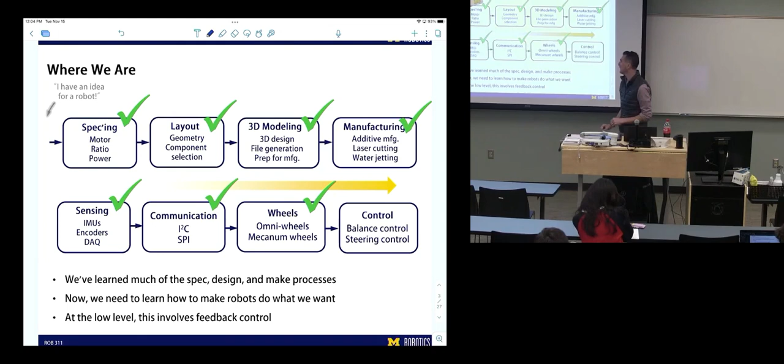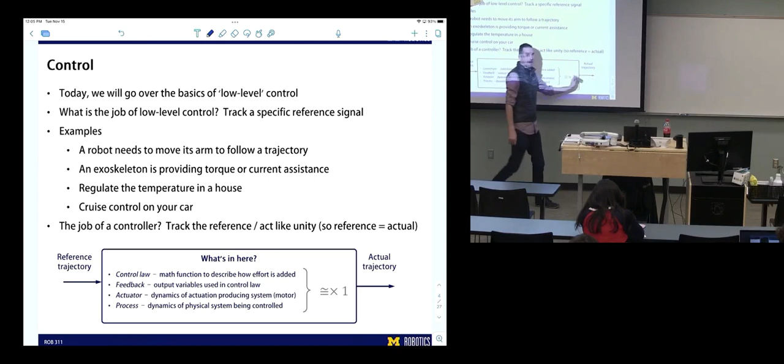So we talked about control. What's the number one objective of a feedback controller? What is its goal? Track a reference, that's the game. Everything is about tracking a reference, which we might think of as making a robot do what we want it to do. We want it to track a reference. So our general idea of a control strategy means we want this control strategy to just equal 1. If it equals 1, our reference trajectory will match the actual trajectory, and it's a perfect controller.

Why doesn't this work? Why is this hard? All the systems have lag. The systems have their own properties, and those properties can have lag. That lag makes it not quite so easy. Good.

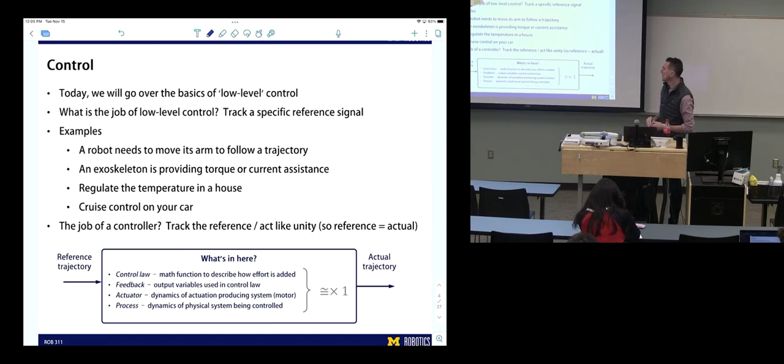This was setting up both why it's hard, but also the standard diagrams for a feedback controller. We talked about how each one of these is a function represented by an ODE, a differential equation. If you've taken other feedback control classes, you might represent this as a transfer function inside each of those, but this class does not deal with transfer functions, so we won't talk about it.

Do you guys have a clear picture of, for example, what the ODE was, where it would come from for the actuator dynamics? Or is that not clear to you?

Yeah, just like torque equations or the angular velocity and acceleration as the differentiable variables. So it would be a set of equations.

So motors have two inputs and two outputs. There can be lots of equations that relate what it is that they do, but they come from Newton's second law, the equation around inertia. We use that as KT times I equals J times theta double dot plus B theta dot plus torque, load torque.

And we also had Kirchhoff's voltage law, which gave us the voltage relationship, including current and its derivatives. So those two equations can be rearranged to get this relationship. We aren't going to talk about exactly how to do that because we're not really learning the tools to do that, so just know that's what's in here.

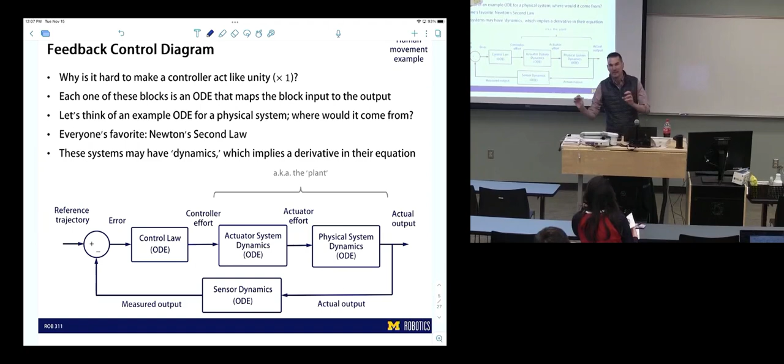What are we showing here? What is this whole thing? What's going on there? Why am I showing that to you? That's a good question to always ask yourself to check your knowledge. If you're not understanding where I'm coming from, you should be able to answer why did I show this to you. A lot of this content has been curated with a really specific intent. So what's going on here?

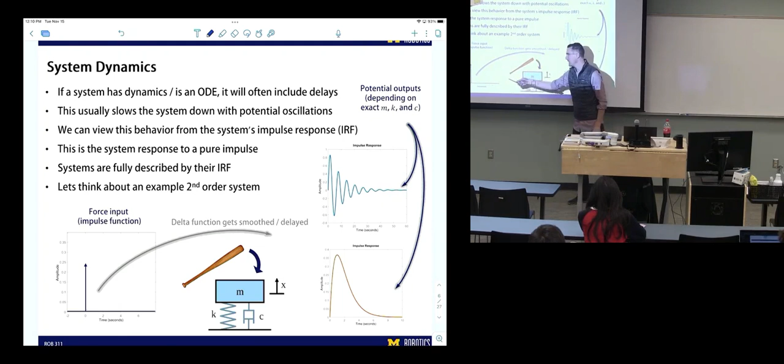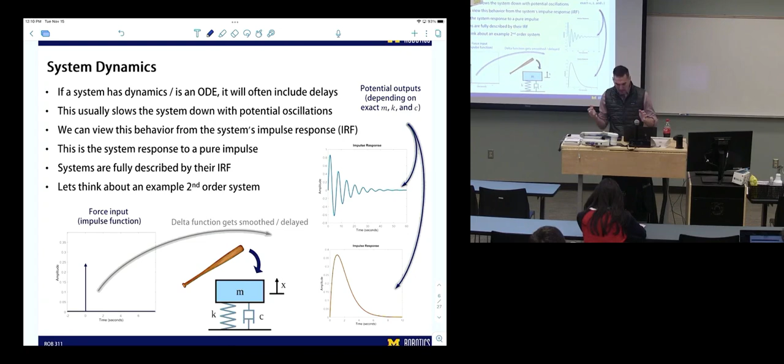Who knows convolution or has heard of it? You guys know that if you take the input of a linear system and its impulse response function and convolve them, it will give you the output of that system. That's another reason we touched on this—to help you get familiar with seeing these concepts. This is refreshing these concepts of system dynamics.

Dynamics exist in each one of these blocks. Those dynamics add delay, they add challenge to the physical system, and this is kind of where we would get each one of these ODEs. What do we say about sensor dynamics?

Fast. Which means there's going to be minimal lag associated with your sensor. That's another way of saying the actual measured output should be very, very close, even at high frequencies—it's going to track closely even when it's oscillating very quickly. Yes, that's good, that helps the whole system. That's a desired property of sensors—you want them to be fast.

Does an encoder, like an optical encoder, have dynamics?

I would say it doesn't, because you're looking at the actual physical change and it's being measured, so there's no delay between when it happens and when it's read. For example, with an IMU that has a big mass on a spring, the size of that mass is going to govern how that sensor senses. In an encoder, there's no concept of that. It's motion, that motion is read. There's no dynamics. Make sense? Okay, good.

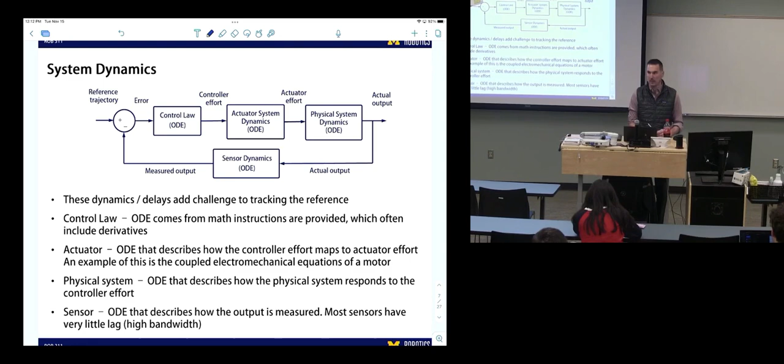Awesome. Okay, so now we're kind of going back into PID. The number one game is drive the error to zero. If the error is driven to zero, the system is acting like unity, has unity gain. That's what we want. Our control law is going to operate on the error, which is the difference between our reference and our measured output. Everything's going to be about driving that error to zero. We defined three terms, P, I, and D, and the total controller effort is the sum of those three terms.

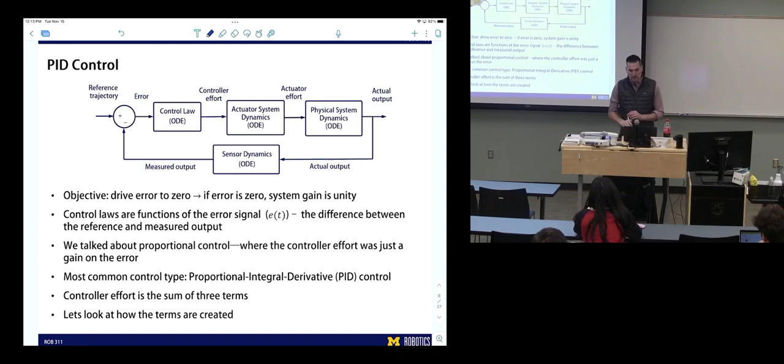And we talked about how these terms are created. You guys are comfortable with this, I think.

What's going on there? Why is there a tau in there? There's no tau in anything else. What's going on there? Yeah. Can't really, your bounds can't be the same variable as the actual integral. That's true. But why is this bound a different time variable?

It's integrating over time to get a single value, and the area that it's integrating over is time, but it's not the same time as t, which is one of the bounds. So does that make sense? It's integrating over - if you want to evaluate at t equals now, we have to integrate over time. So we're not integrating over t time, because that's what we're interested in. We're calculating the value for t equals now. So we're going to integrate over time in the past. That integral from t0 to t goes up to time equals now of time tau. Not sort of a different t, but it's still time.

Make sense? So I'm trying to think of challenge questions to check how well you guys are tracking this. Let me think. I think I'm good with this. I'm gonna keep going.

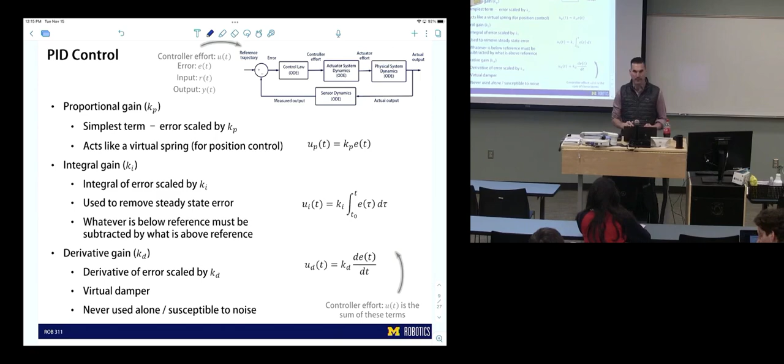We did this example, which was cool. Almost all of you got this. This is great. If you can calculate this and these terms, then you're tracking PID well. If you can't, then that would be bad.

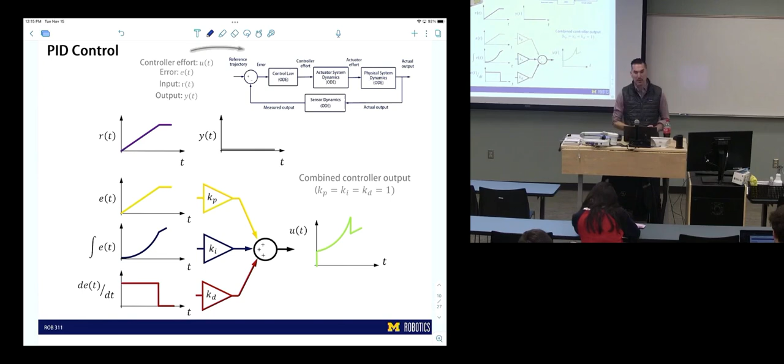So if I had more time, I would have created a couple of versions of this, a couple of exercises, just as practice. But first, identify your error function, then you're going to manipulate that error function. It's easy to figure out its derivative and integrals once you define the error function first. Then we just sum them, multiply by their PID gains.

This gave us some vocabulary about how to talk about control, these concepts in the time domain: settling time, rise time, percent overshoot, steady state error. Just gives us a vocabulary for me to talk about. And then we talked about this being a type of test called a step response test, which is pretty much the most common way to tune a controller.

In order to do this type of test, you have to be able to see your data. So you have to be able to save your data and look at it. We've learned how to create this data matrix and save it, so you guys could do your own step responses. That would be very doable. We're also going to learn tomorrow a way to plot your data live.

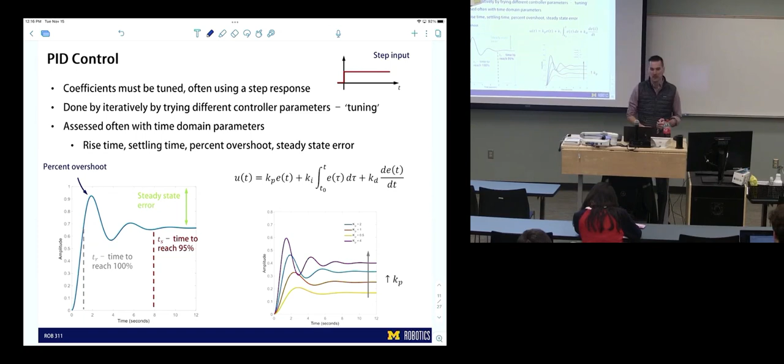We also talked about how to tune. We have to set these PID controller coefficients, and we talked about how to do that. There's some literature on it called Ziegler-Nichols. We did a shorthand version of that where we increase KP, back it off, then we're going to increase KI to remove steady state error, and then increase KD to remove oscillations.

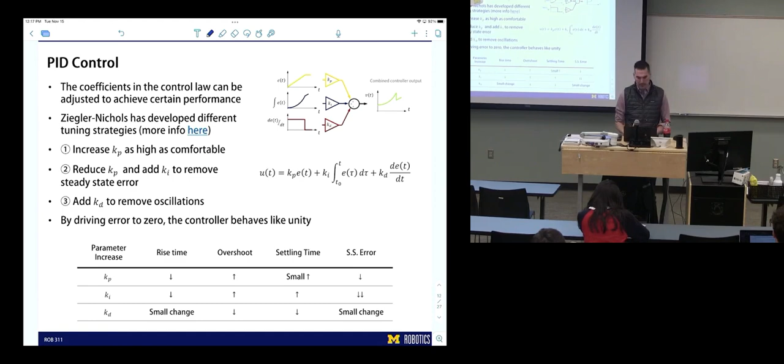We talked just for a second about reference trajectories. The only thing I really wanted you to know is that the higher the frequency content in the reference trajectory, the harder it's going to be to track.

The harder it is to track, another way to say that is the controller gain will not be 1. Does that make sense? If the controller gain is 1, that's equivalent to perfect tracking. So if it's harder to track, the controller gain will stop being 1. Will it be greater than 1 or less than 1?

So let's say I'm trying to give it this reference to track, a fast trajectory. I wanted to track something moving very fast. We talked a little bit about what we think it's going to do. And you guys knew this. What's it going to do?

It's gonna have like the amplitude, it's gonna kind of lag behind a little bit with a small amplitude. Yeah, it's going to start lagging behind. The amplitude's going to decrease, which is going to make the overall gain less than 1. So the gain for this would be 1 for low frequencies, and then as the frequency increased, we'd start to see the gain become less than 1, and eventually the gain would be 0.

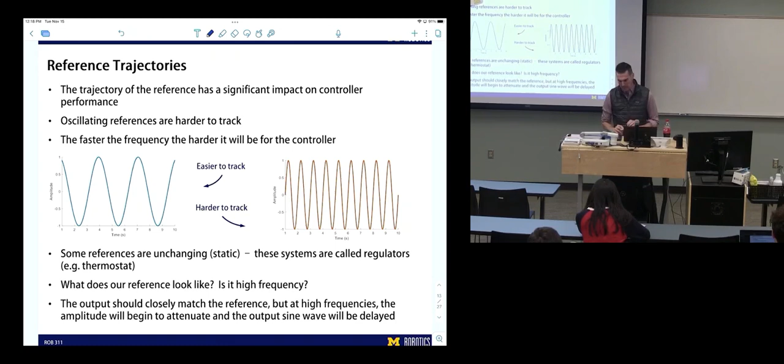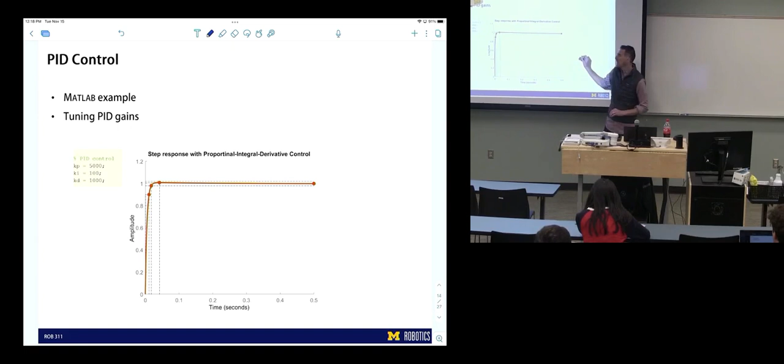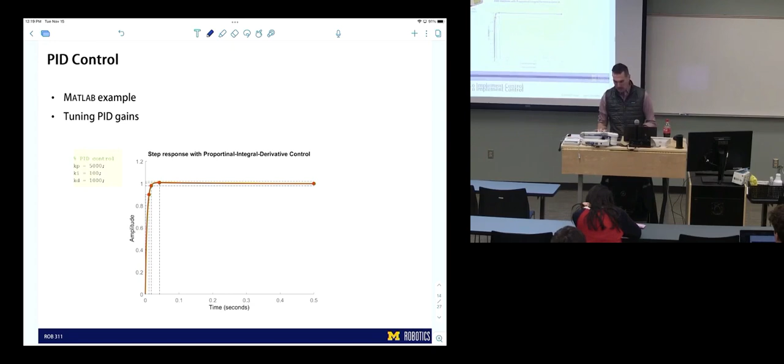Cool, okay. We did this tuning example, which was pretty neat. You guys did great on that, turned it in. Here's just an example of what I did. This shows all, if you right click and have it show all the characteristics, that's what's being shown in MATLAB. So you have practice tuning it in MATLAB, practice looking at your step responses and analyzing them and viewing their different characteristics. You guys feel good about all this? Awesome, okay, now we're going to go into actual lecture content.

Now what we're going to talk about is how do we actually implement this in code. This is maybe review for some of you, but I want to make sure everyone knows it. We're going to go through your control loop structure. These are concepts you've begun to see in lab, but now we're going to talk about it formally in class.

Your control loop's going to iterate every, in our case, 1/200 seconds. There are a few things we want to discuss when thinking about implementing control in software. How do we calculate the derivatives? And how do we deal with nonlinearities, and what are they?

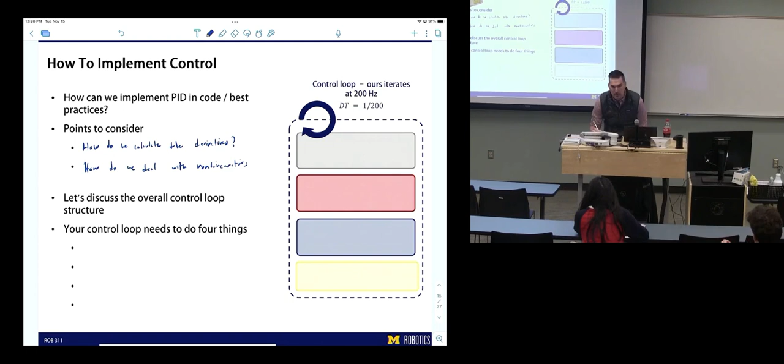Let's talk about control loop structure. This is what we talked about in lab in the past. What's the first thing that your control loop does? It collects data from sensors. Then what does it do?

Do you know, or what's the next thing it has to do? Calculate the error. I'm going to call that as a whole: calculate actuation commands. Then it has to actually send those commands, execute those commands on the actuators.

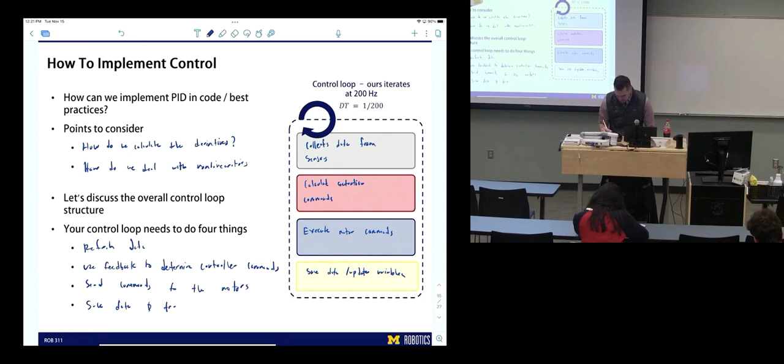And we need to save data and update variables. Those are the four jobs going on inside your controller: refresh data, use feedback to determine controller commands, send commands to the motor, and save data and update variables. That's it, that's all it's doing, and it's gonna do that real fast.

Data collection. First thing we gotta do is collect data from all of our sensors. Generally, the way this would look normally is a series of communication library calls. What's a communication library? When I say it would be a series of communication library calls, what does that mean?

We have our messages.py file, which has all of the different message types available to us. You have to essentially pull some data from, I guess, the Pico through that. Yeah, that's how we do it in our system. So in our system, the data are being refreshed automatically in the back end for you. You don't have to do anything to get the data; it just appears in these state variables for you, which is awesome, a very clean and efficient way to do it.

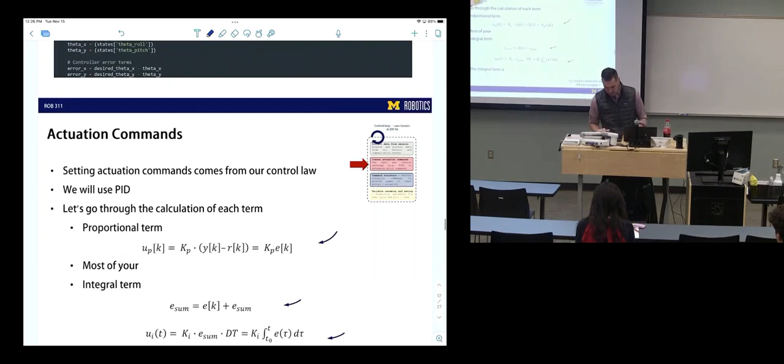This is an example where we're just kind of getting the data like you've seen before. Step one, get the data. Step two - this is kind of where the meat of today's lecture is, actually building these actuation commands.

We're talking about PID. We're gonna go through these different terms and talk about some nuances to calculating these terms.

So this is your proportional term. UP of K - that means that's the controller effort from the P term at loop index K. So that's just gonna be KP times the difference, YK minus RK, or KP times error. Easy.

Most of your controller effort will probably come from this term. The proportional term adds a ton generally - usually adds a lot to your controller. That's where a lot of your controller effort's gonna come from, and it's easy to implement, that's great.

Integral term - so this is how I would potentially implement it. I'm implementing it basically in two lines here. These lines are half math, half code, so that's kind of trying to make sense. I thought it made sense, but this is the integral.

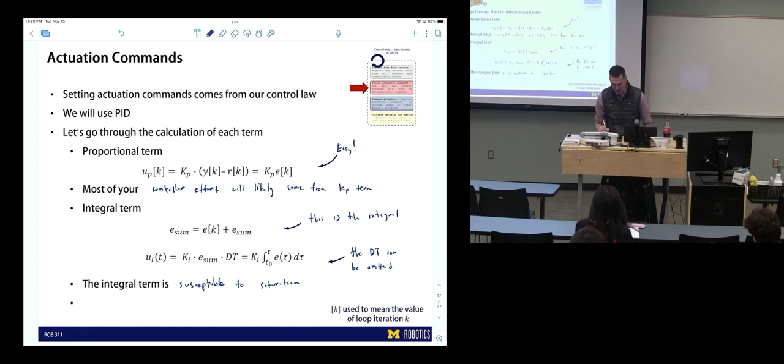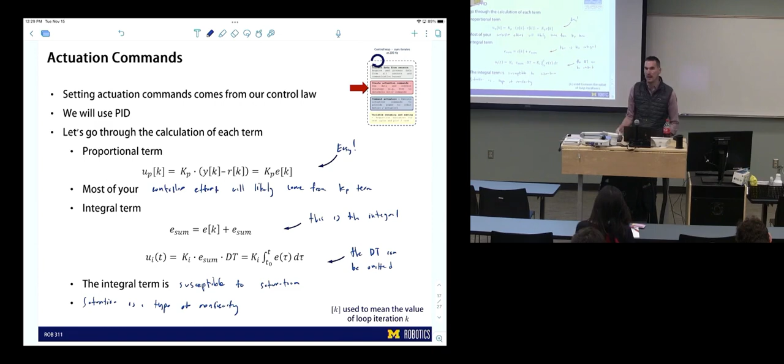Saturation is a type of nonlinearity. So if you're using the fundamentals of linear systems, which we're using in this class, that will break down from saturation. Okay, so let's talk about this.

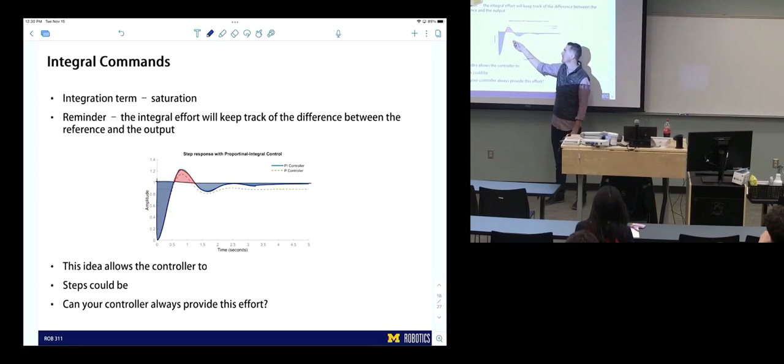As a reminder, your integral effort is going to track the integral of this error. So it's going to be summing the blue, removing the red, summing the blue. Make sense? The effort of the integral term will be proportional to that area.

This allows the controller to add as much effort as needed. Agreed? This area can be extremely large. If we're taking a big step, and it takes us time to get there, this area can be very, very large.

Can your controller or actuator provide infinitely large effort? No. So that's kind of where the issue is. So I'm gonna say steps could be arbitrarily large.

In your application, what I mean by that is, you might tune your controller with a step response. That would be a very common way to do it. But in your application, your reference is going to come from some other objective, and then the dynamics of your system. So the error step that it sees could be very large, very different than your step response. So if you tune it for one step, and it sees a really large step, that could contribute to adding a lot more error than maybe you were expecting.

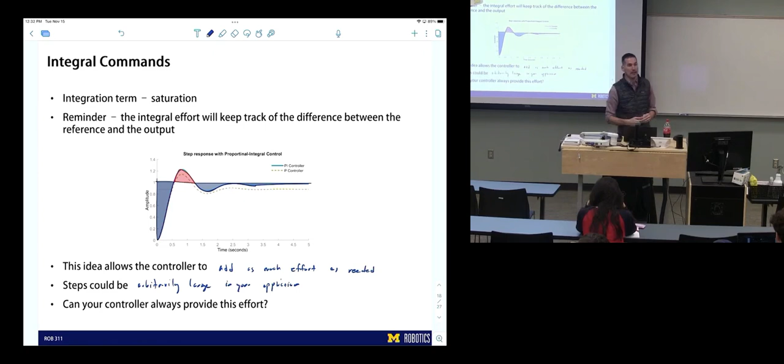Think about it like your gas pedal in your car. Let's say you give yourself a step velocity, you want to go from 60 to 120 on the freeway. So you're going to floor your gas pedal. And at that point, it doesn't matter how much extra controller effort you give it, there's nothing it can do. It's going as hard as it can. That's a nonlinearity, that's saturation.

Where does saturation come from in robotics? Typically it comes from pulse width modulation. Pulse width modulation is something I've been trying to work into this class for like 2 months, so now I finally have a good time to talk about it. You guys already probably know pulse width modulation, but I want to make sure we talk about it.

Pulse width modulation is how the voltage command is provided to your motor. That's how it actually receives electrical power, from a PWM signal. The PWM signal is a quickly oscillating voltage that varies between 0 volts and supply voltage. The average electrical voltage applied is set by varying the duty cycle. By varying the duty cycle, the applied voltage can be varied.

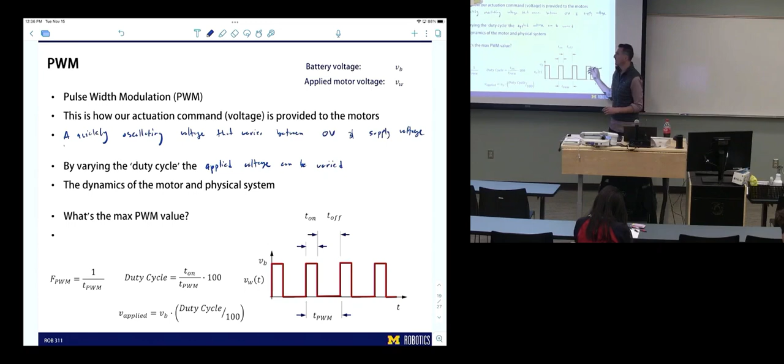So as long as your PWM signal is oscillating faster than when it gets smoothed out, it's fine, and they all usually oscillate very, very fast. So to send electrical energy to a motor, we vary this duty cycle, varying the motor seeing battery voltage, 0 volts, battery voltage, 0 volts.

The dynamics of the motor and physical system smooth out the rapidly oscillating voltage. What's the max PWM value? 100%, so that's gas pedal fully down. This creates a nonlinearity when the controller, let's say, maxes out.

Okay, so now we know saturation is a thing. Now we know where saturation comes from. It comes from our gas pedal being all the way down. What effect does it have?

Is that a question? Yeah, I was just wondering, how fast is PWM, like what's a typical PWM frequency? 10 kilohertz would be a common one. Fast, okay, yeah really fast. They can be in the megahertz range.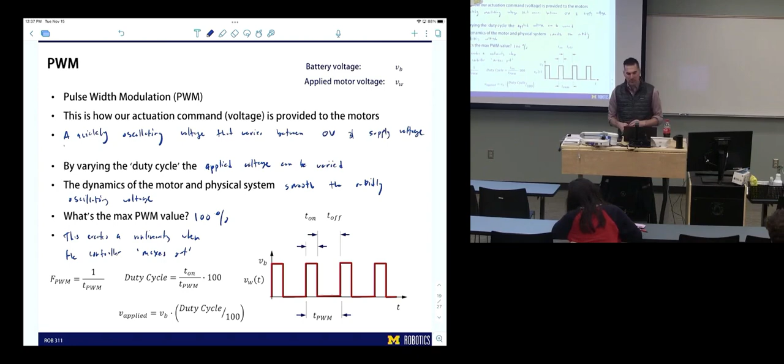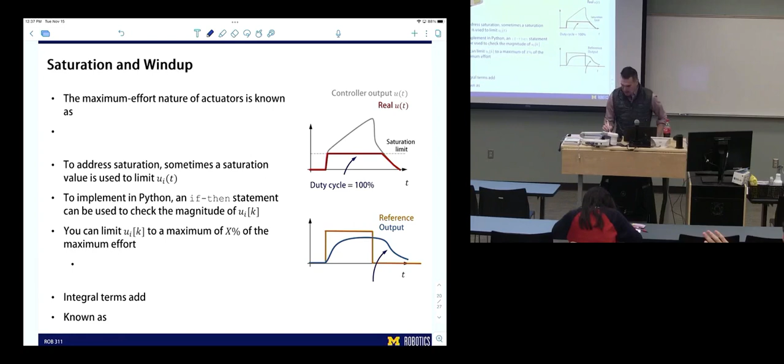Okay, so this is why this matters. The maximum effort nature of actuators is known as saturation. That we sort of covered, I guess. Yes.

When it's at 100%, is it still oscillating between on and off, or is it just always on? It's always on. At 100%, it's always on.

What can saturation do? Any idea what saturation can cause? Some of it's on there, but some of it's not. What does saturation do for your car? Any idea? It's going to cause inefficiency.

And excessive overshooting. It causes excessive overshooting because it's going to build up all this error that it then has to remove. The only way it's going to remove that is going way over the reference.

So to address this, sometimes a saturation limit is used on U_I of t. What is U_I of t? What is this variable? When I say use a limit on U_I of t, what does that mean? Just to make sure we're on the same page - the output in the PID loop of the integral term, the controller effort specifically coming from the integral term.

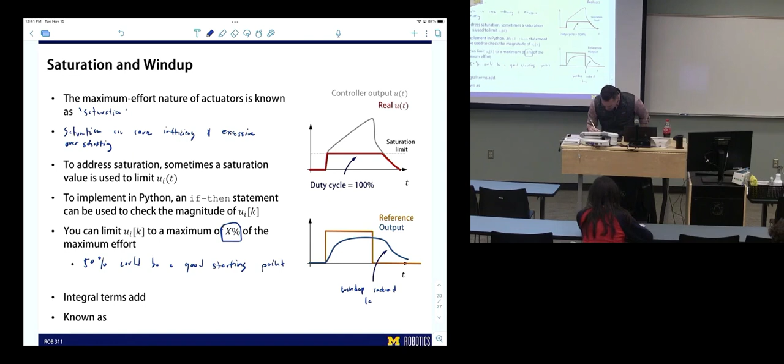Why would this saturation limit need to be implemented for the integral term, but not the proportional or derivative? Because those terms won't likely build like an integral will - an integral will build way faster. Right, yeah, so you just don't see it.

It won't, even for a fixed reference and output, the integral will grow unbounded, but your proportional term won't. That's what I think of it.

Something I've done in the past, like counteracting saturation, would be more of an I-zone, where if it's in this zone, it doesn't actually increment the integral, and in fact, it resets it to 0.

Is that another way? Yeah, that's another way to do it. For this, it might be, don't let it, that would not maybe be saturation, that would be something else. It kind of prevents it, I guess the I term can still, if it's not responding, start saturating if it's continuously off. I've never gotten to the point where saturation could be a thing, because if it's actually responding correctly, it would go back to 0, it would keep resetting the integral to 0.

I think that makes sense, and I also think you guys should feel empowered to take these concepts and mix them up and try things that occur to you that seem like they might help. That's something you can and should do for this project, and it could look like this: you observe something with the ballbot, you're looking at your controller efforts and seeing that one of them is always getting too big, and you need to figure out a way around that. You can just do that and execute it, and a lot of times those are actually really helpful.

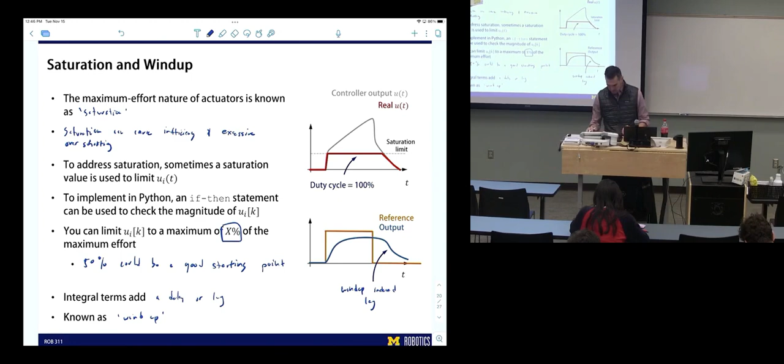Next, just like derivative commands. So we've talked about proportional, it was easy, nothing to say. Integral, you have to watch out for saturation - we talked about that, how to create the running integral and saturation. Now we're going to talk about the derivative commands. Small nuance with that.

Calculating a numerical derivative, or the derivative term, requires a numerical derivative. You have to calculate a derivative in your loop. Most common is the 2-point finite difference.

So what this is saying is our variable dE by dt of value k is going to be e of k minus e of k minus 1, divided by dt.

So this means you have to track your previous value of error. You need access to that in the loop. This guy, e of k, that's your error of the current loop value. E of k minus 1 is your last loop value. So that means you need the error from the last loop. That means you have to say that.

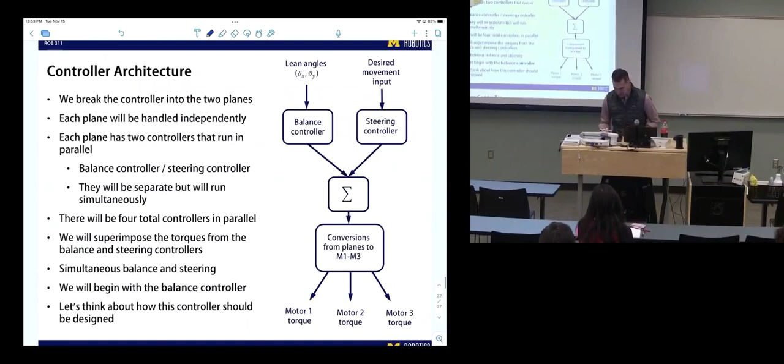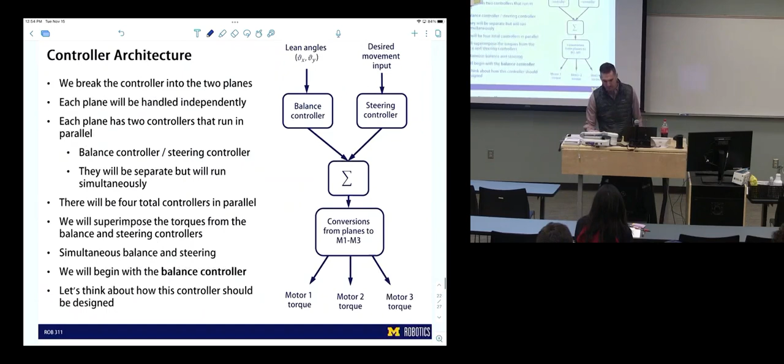But I do want to re-go through the control stuff, the control lecture we saw in lab, because you guys haven't seen that in actual lecture content. So I just want to talk through the control loops. This is a great time to ask questions or make sure there are no blanks on these. I left them blank, so we can just talk through them.

Now we're talking about the control loop. We're building the controller effort variables. What are your controller effort parameters in your control loop? We have two controllers that we're talking about, running in parallel. Each one of these controllers controls in two planes, the two fundamental planes we're dealing with. Then we sum their efforts, convert it to the torques for the three motors, and send those out. Does this make sense? You guys track this schematic? Okay, good.

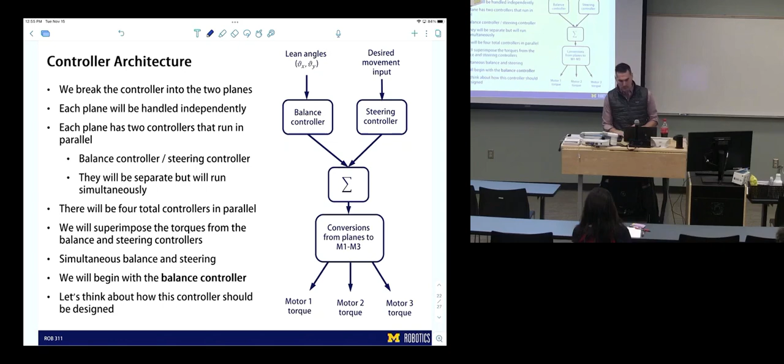Okay, so we began lab by just doing a simple P controller, and at that point we hadn't talked about PID. We got to this by saying it makes sense that if it leans, we want it to restabilize. If it leans further, it's going to be harder. So we kind of derived from common sense this idea of a proportional control law.

I had a question on the previous slide. When it says the desired movement input, they're kind of separate. Is it also possible that you could combine them by making the desired movement input just change the desired lean angle instead?

So exactly how this is done, there are tons of options. We have done the lean angle option. That was the first controller idea that we thought of. It was basically having the controller input just change the lean angle, and so you lean it forwards, wherever direction it's leaning, it's going to be rolling in that direction. So we did that. It was very difficult.

One thing is, once it starts leaning, it doesn't stop, that's an acceleration. So it's just going to keep accelerating if you keep it leaning, going faster and faster and faster. So we're kind of working on that. We have some new ideas that we're working on now that might work their way back into the course at the end. But yeah, so we've done that. You could do exactly what you're saying.

I kind of like this idea so far, which is we have a balance controller running all the time. The steering controller is going to allow you to rotate it around the z-axis and drive it along the x-axis. So it only drives along the x-axis and only rotates about the z-axis. That's one idea. As opposed to another idea would be to have it drive with no spinning, and just be able to drive in any direction. That's what we first did.

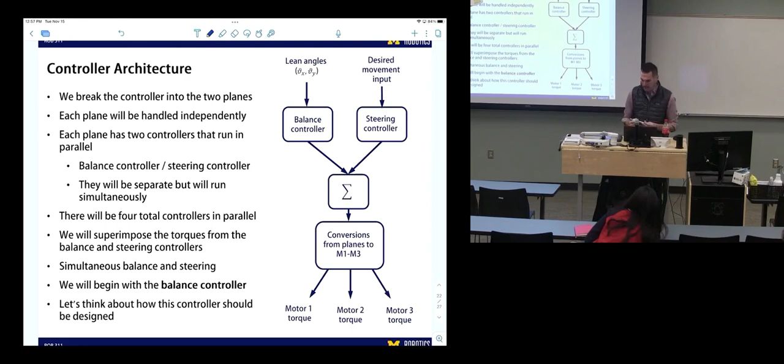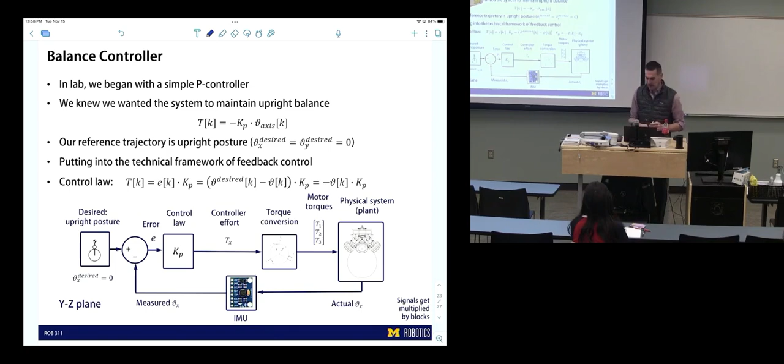You guys tracked this? I've rewritten this in terms of K, like loop index K. This was our control loop for the balance controller for one plane. So we just got the control law by saying it's the error times KP, and the error was, since it was referencing 0, the error was essentially the variable. And then we did two planes.

Do you guys understand this, as much as you can, like 100%? Do you feel super comfortable with what's going on here, how this diagram goes back to the control loop diagram that we were showing? We were just showing the controller ODE blocks. This is the same thing. Does that make sense? Okay, good. Awesome.

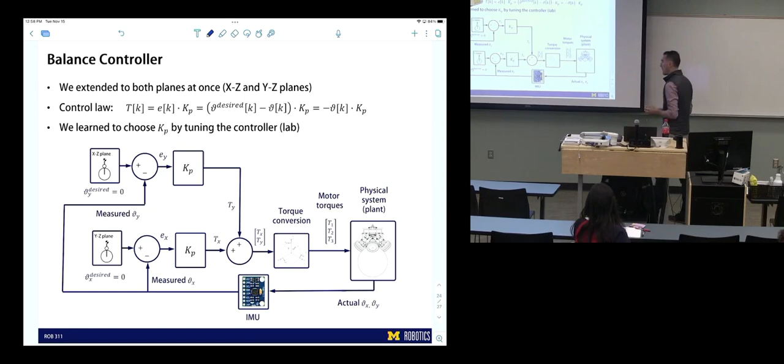And then this is kind of where we ended, where we are now, which is now we have a balance controller and a vertical axis controller. Each one of these creates a torque, z, y, and x that gets summed and translated. And what we're going to do is figure out the best way to use this controller to not just steer, not just rotate and balance, but then actually steer.

One of the reasons why your homework assignment was the rotation part was to give you this understanding of the mapping between torque and rotational velocity, so that when you started to use your controller, you'd have an idea that if I assign this button to this torque, that's going to make it rotate at this speed. Does that make sense? That was the intent behind that.

So this is saying theta desired minus theta x equals error. So when they're minus, it's just algebraically subtracting that variable. Each signal, like each arrow, is a data structure, and each block is typically a math operation.

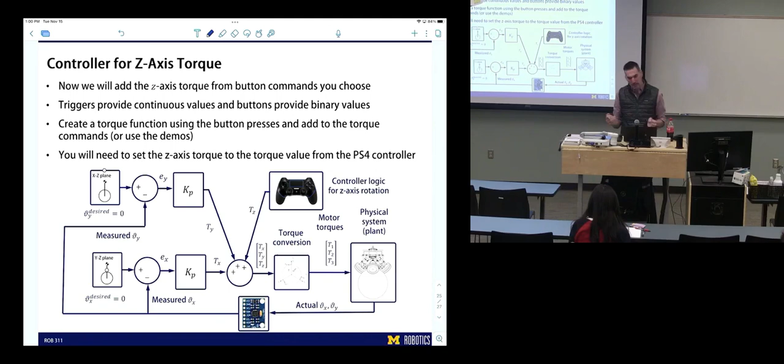Cool. Okay, I'm just going to do these last two slides and I can maybe end a little bit early, unless you guys want to talk about other concepts. I just went through these slides a little faster than I was expecting.

So now we've done how to collect data. Certainly in your setup, it's collected for you. How to create control laws and actuation commands. Now we're talking about how to send those actuation commands. This is extremely straightforward in our project because of the infrastructure we provided.

So you're just going to set it up like this. That's how we send the commands to the motors. You guys could also, if we hadn't done this, find examples of sending PWM commands or however it worked with whatever you were doing. You can usually find tutorials on YouTube or on Adafruit or SparkFun.

So what I don't want is the fact that we've done this infrastructure building for the PCB and the Pico to now hold you guys back after the class. That's what I'm trying to prevent. At the same time, I'm trying to get you guys access to these boards later, so if you want to keep building robots, now that you know how to use all this infrastructure, you'll be able to. Those are two side notes.

But okay, at the very end of your loop, you're just going to set your motor commands. It's going to apply this voltage to the motor. So in our world, we're going to take that torque, convert that into a duty cycle, and send that based on the properties of the motor.